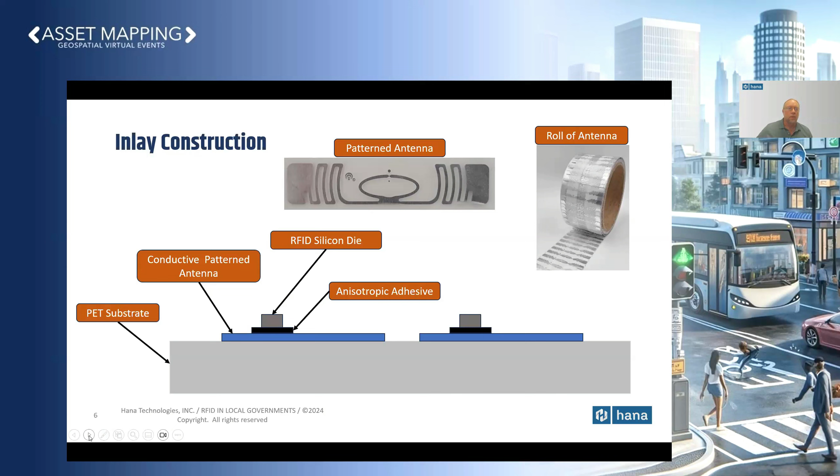The next thing is design considerations, right? So for designing an antenna, what die do you want to use? There are several out there on the market - Impinj, NXP, Alien, a lot of different vendors you could use.

What type of standards do you need to meet - ISO, EPC global standards, for example. What frequency band are you targeting, is it a European band or FCC band in the US? And what kind of memory allocations does that die need to have on it? Some people want a little more memory, a little less memory - they use the different embedded memories on the chip for different things.

So we look at the die first, because that's the key to the performance. The target application - what's it intended to use on? Is it retail, automotive, pharmaceutical? What are they going to use this tag on?

The form factors are extremely important. If I have a larger tag, it's going to have more surface area to collect energy and power up the chip and send that energy back to the reader. If it's smaller, it's harder to do that, so you have to take that into consideration when you're making the designs.

What materials is it going to be placed on? If I place this on a cardboard box, a uniform label, or a badge - all these things can have a significant impact on the performance, and that's something you need to be careful about. You can have one result on one material, and it completely shifts your performance when you put it on another material, so you need to understand that very clearly.

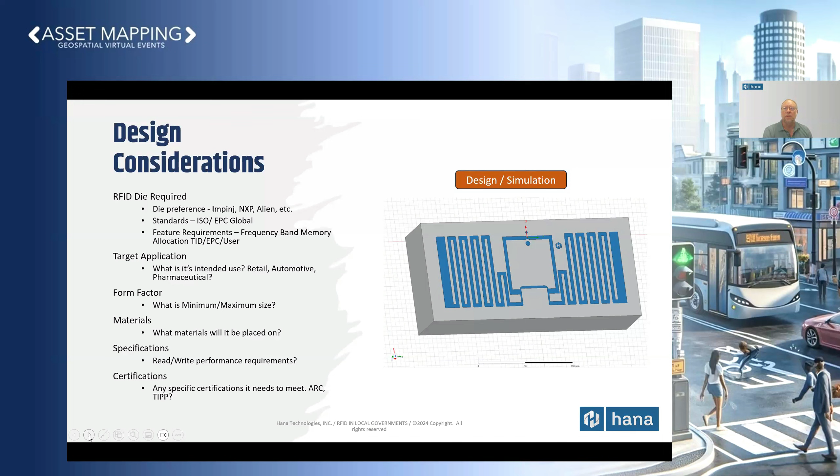A large one we use is ARC here. ARC is a system that takes all things into consideration for different angles and different materials. Once you get certified, a customer can just select from that category and use it. RFID performance is a big key factor.

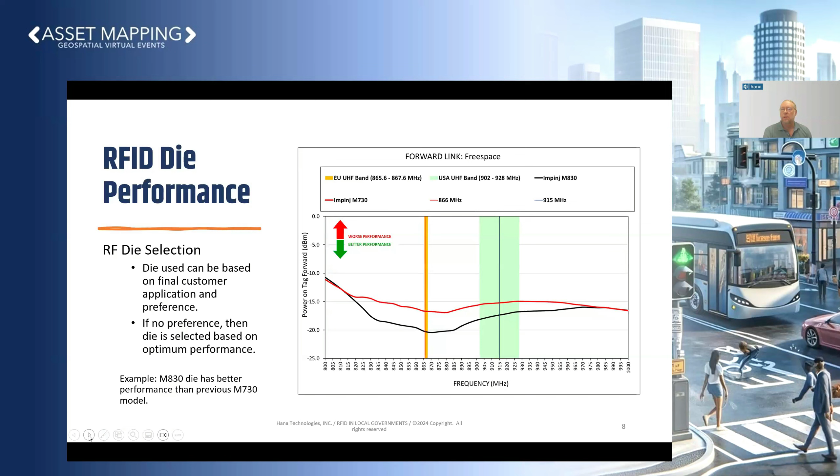I'm just showing one example here. The red line is a previous die, Impinj's M730 die. They've come out with a new die, the Impinj M830, which gives some additional read range performance. This is placed on the same antenna, so I didn't change the antenna design, just changed the chip, and we got a nice bump in performance. So we can now adjust that frequency, tune it for different applications and materials, and maximize performance for that application.

Once we've done that, we do a product launch. We basically read this tag on different materials, and we'll show examples of that. We have expected performance on cardboard, it could be uniform fabric, plastic, glass, or metal parts. This is just an example of something we produce, so you could at least have an idea of how these things perform. You can see there's a variation in read range depending on what materials you place it on.

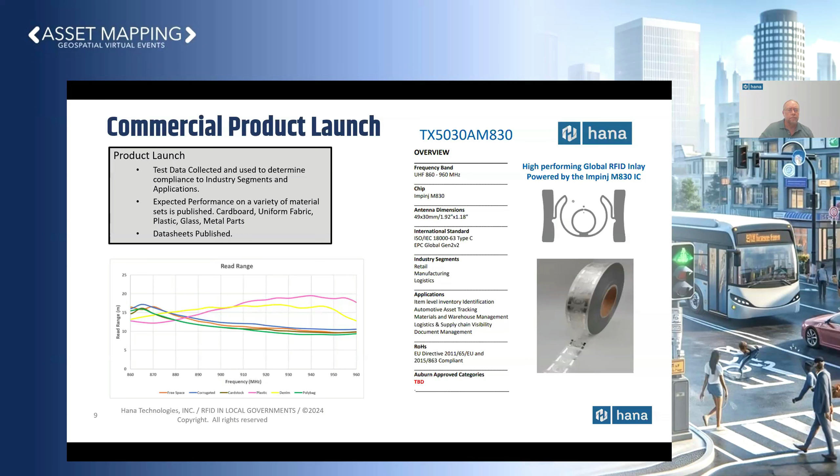Here's a few examples of different form factors. We have things like the 2720, a small round device that goes on the bottom of plastic bottles. Sometimes they have to read on a rubber tire, for example something like an 8040 for an automotive application. We have small thin ones, like the 9508, that have a really good read range, great performance over the frequency bands, and good performance on different materials. But it depends on the customer's application. A lot of times they're driving everything smaller and smaller, because that drives the cost down of the label and the inlay, which makes it more challenging to read everything.

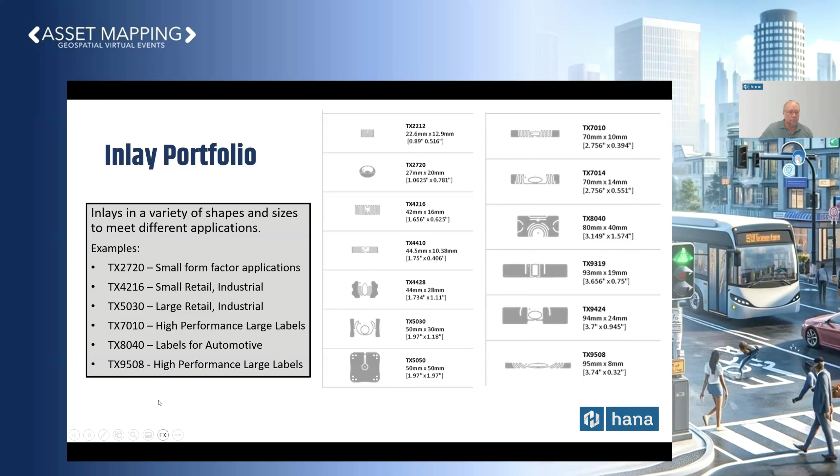Now, how is it manufactured? Here's a picture of Hana's facility. We currently have 6 high volume roll-to-roll machines. Basically, we load the web on one side, it dispenses the epoxy, places the die, does thermal compression bonding and testing, and sends out these rolls. We have about 3 billion capacity per year currently at Hana.

After we've manufactured these things into inlays, they need to be converted into labels for different applications and materials. We work closely with our converting partners to turn these inlays into our final products that are used in the industry.

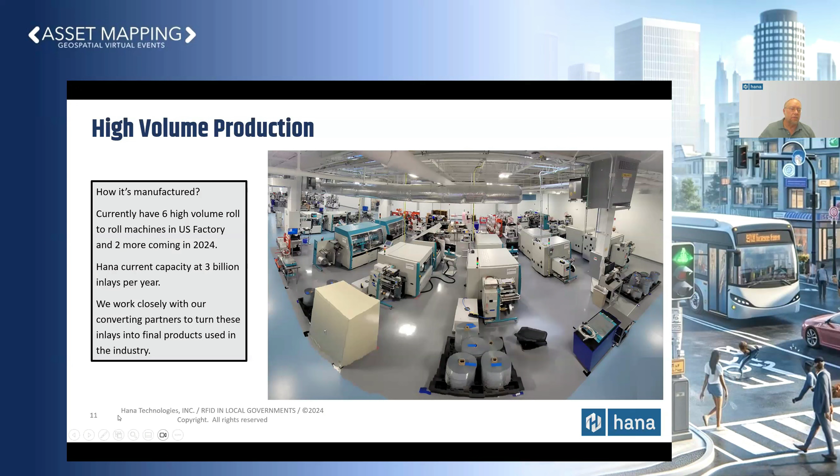Hello everybody out there, happy afternoon. I hope you are having a really wonderful day so far. Rochelle? Yep. You need to switch your slides from display settings, we're seeing your notes. Oh, upper left corner where it says display settings, swap presenter view. I think swap presenter view. Oh, there we go, that's it.